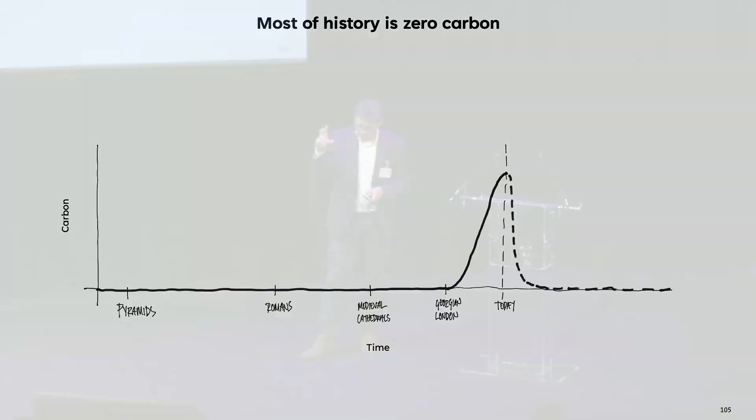We have accelerated hugely over the last 50 years the amount of carbon that we as a species are producing and emitting into the environment. We also know that we will probably - and I'm pretty confident it will happen, I'm not one of the pessimists about it - get to a point very soon where we're in a post-carbon age. It is from today, the next couple of decades, plus the previous 200 years or so, that will be the aberration - that's the unusual bit. The whole of the rest of our future will be zero carbon, and the vast majority of our past is zero carbon. That's where we are, without question, headed.

But how do we get there on facades, or how have we got where we are now? This is a photograph I use a lot in talks - I think it's the most significant building of the 20th century. Most people haven't a clue what it is. It's called the Milam Building in San Antonio, Texas, built in 1928. Its significance is that it's the first building in the world that has air conditioning in it - the first building for human habitation.

Air conditioning was developed in the meatpacking industry in Chicago in the late 19th century, but this is the first building that has air conditioning in it. As you'll see, it's quite a traditional building in many respects - it's got small windows, heavy brick facades, opening windows. The air conditioning is augmenting its environment, not creating an exclusive artificial environment. If the air conditioning in this building breaks down, the building is broadly still habitable - not quite as comfortable, but broadly habitable.

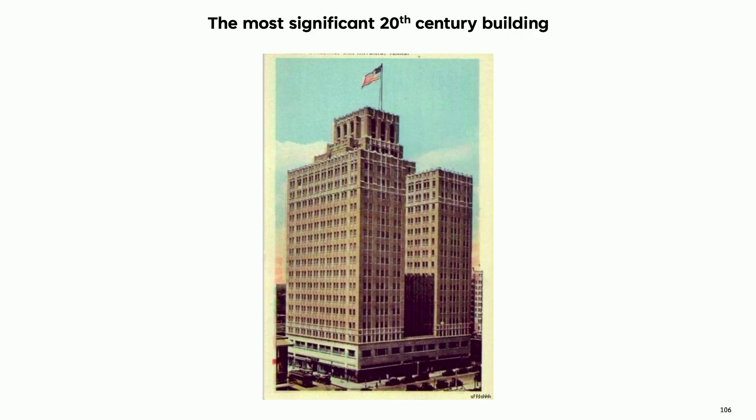Then you come to - and I'll start with a caveat, I was in Berlin last week, I went to the National Gallery by Mies for, I don't know, about the 10th time. I am hugely into and adore Mies. This isn't a pop at Mies, albeit it might seem like it - I'm a massive Mies fan. There's two Mies buildings in this.

But they record an interesting evolution for architecture, really. The first one is the Friedrichstrasse competition from 1921 in Berlin. Mies didn't win - that wasn't built, and it couldn't have been built. The structure existed, the cladding existed, the lifting technology existed, but in pre-Second World War, relatively poor Europe, the mechanical systems didn't exist for that building to be inhabitable. It could have been constructed, but it could not have been inhabited.

Then the Second World War happens. There's a massive technological explosion. Mies moves to America, which by then is much, much wealthier and more technologically advanced than Europe. And in the middle, 1958, you get the Seagram building in New York, where basically the Friedrichstrasse building is built - an all-glass facade, the building the same on all of its orientations. In effect, the architecture is being liberated from the need to temper climate.

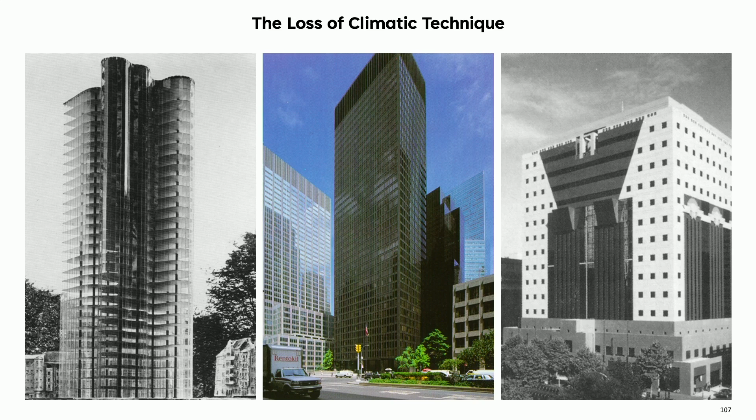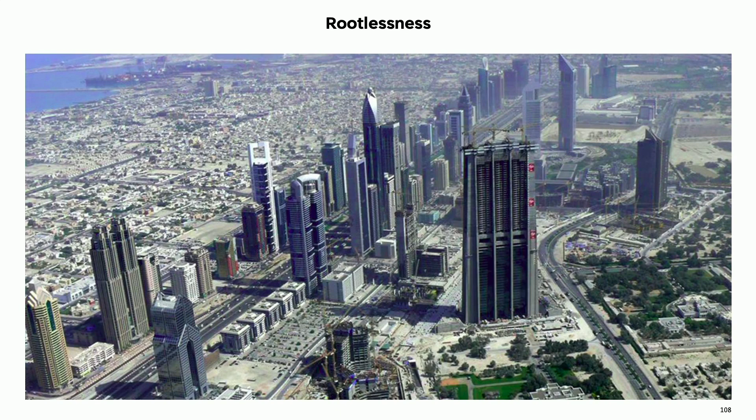And that's part of the problem that we're in right now. It brings you onto places like this, which are completely rootless culturally, hell on earth in many ways, with no connection to its environment. In some respects, these are perfume bottle architecture—the same all over the world, massive glass facades, doesn't matter where you are, everything is the same. There is a massive climatic issue with that, but there is a cultural issue too: a completely rootless world.

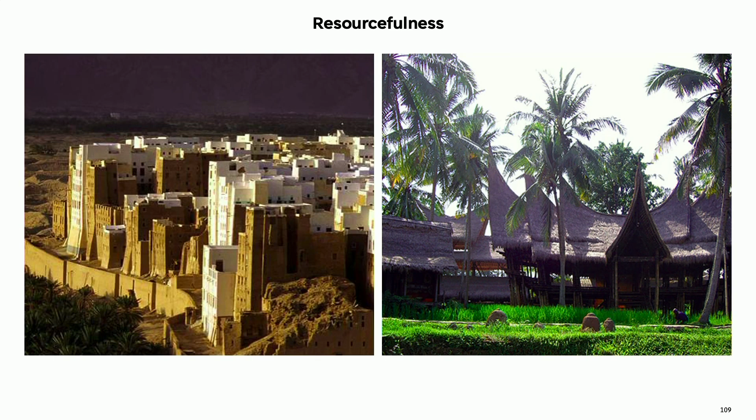We can learn huge amounts from the way vernacular architecture deals with both its ambient climate and the available resources—how it provides shelter while also tempering its climate. We'll slightly gloss over the fact one of the mud houses has collapsed on the bottom right. But whether it's mud houses in Yemen, with extraordinarily large diurnal swings and heavy use of materials to compensate, or Malaysian longhouses in an incredibly humid, static environment, they deal with it in very different ways. There are many things we can learn from that.

This is part of my education. These are the LT—lighting and thermal—curves, developed in Cambridge by a physicist in the 90s called Nick Baker, one of my tutors. At the time, Nick was trying to find a very simple way—these were all Excel-based, very simple models—to produce graphs showing, depending on orientation, internal use, and location in the world, what the best balance of heating, cooling, and lighting for glazing ratios was.

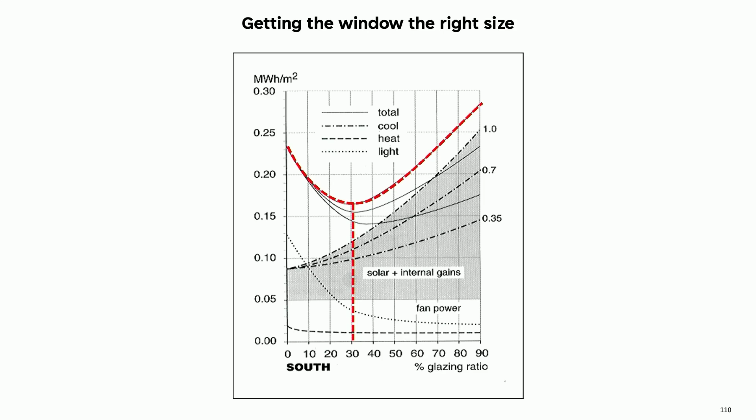As an architecture student, I was incredibly excited by that. I loved this idea that through response to climate, you could manipulate facades and buildings, and they'd change as you moved or what you did inside. We ran parametric studies using Nick's Excel spreadsheet, and the slightly disappointing result was that the ideal glazing ratio was almost always somewhere between 30 and 50%, irrespective of where in the world you were, which orientation you faced, or what you were doing inside.

For a committed modernist, that was hugely disappointing because it's basically a Georgian house. So Quinlan Terry was right, and that's the end of the lecture—a slightly disappointing place to end up: stone facades, smallish windows, and very eloquent facades.

So the dissertation I'd started, looking at how we could manipulate facades, ended up being about this: if the technical answer is so obvious, why are we not doing it? It morphed from a technical essay into really a cultural history about why we are not doing this.

And then, of course, we moved to today, and increasingly we're facing that rather complex balance between operational and upfront carbon. What this is showing is the dotted red line—the cumulative operational carbon emissions from a very typical office building from about 5 or 10 years ago—and the pink is just upfront carbon from that building, day one. As you'll see, they hardly ever meet.

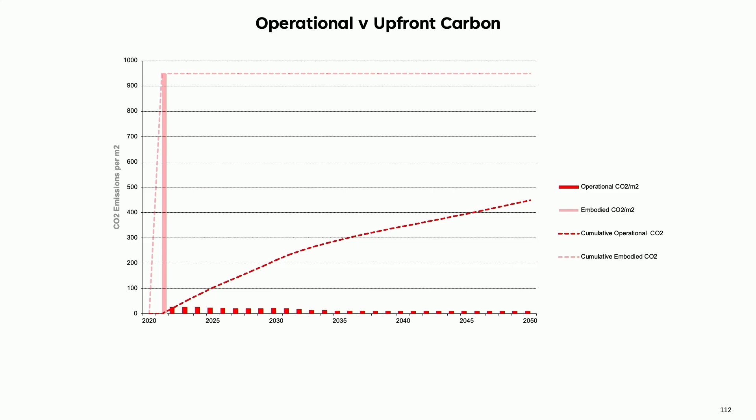In fact, grid decarbonisation is happening much quicker than we expected, so those lines will never, ever meet. Vastly more carbon is emitted by a building before anybody ever inhabits it than will be emitted for the whole of the rest of its life. That alters the equation—whereas we were focused very much on operational carbon for quite a few years, this changes the balance dramatically, and it has a big influence on facades in particular.

There are probably two primary ways we can begin to address that, talking about buildings across the board. The first is simply reusing the buildings we already have—you'll have heard those stats that 80% of the buildings we'll inhabit in 2050 already exist in cities like London. We're seeing this more and more; almost 40% of our workload now, by area, is the reuse of buildings.

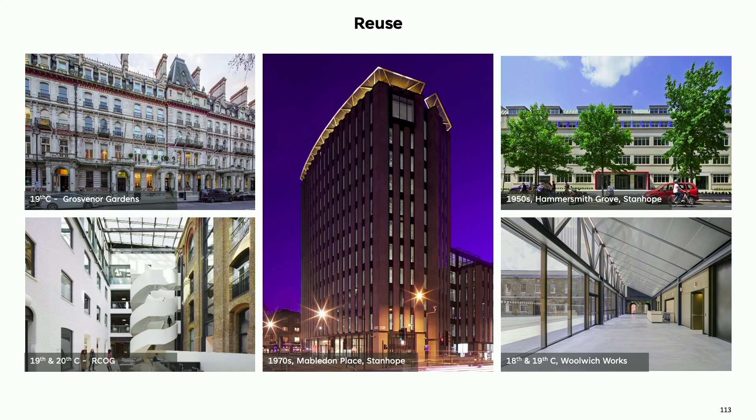If you can't reuse buildings, then the next best thing is to begin looking at much lower carbon materials, especially biogenic materials—principally, but not solely, timber. There are interesting parallels, I think, with a number of different industries and elements of buildings around where we've come from with timber as a structural material.

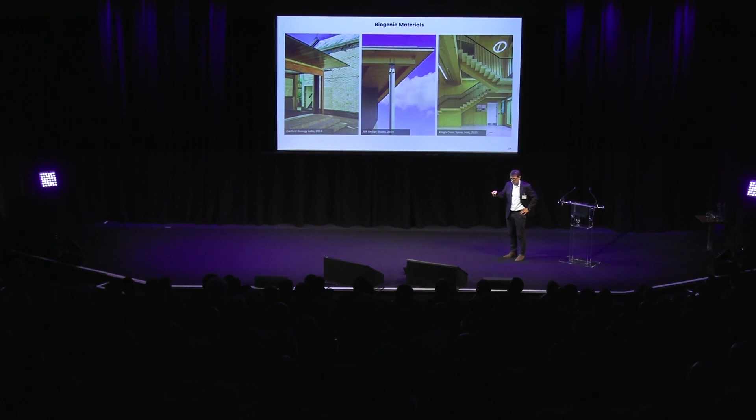I think when we first started looking at CLT in about 2008, it seemed weird and wacky and hairy. If you'd said at the time we'll be doing massive commercial schemes using CLT, like Timber Square referred to earlier, I wouldn't have thought we'd ever get there.

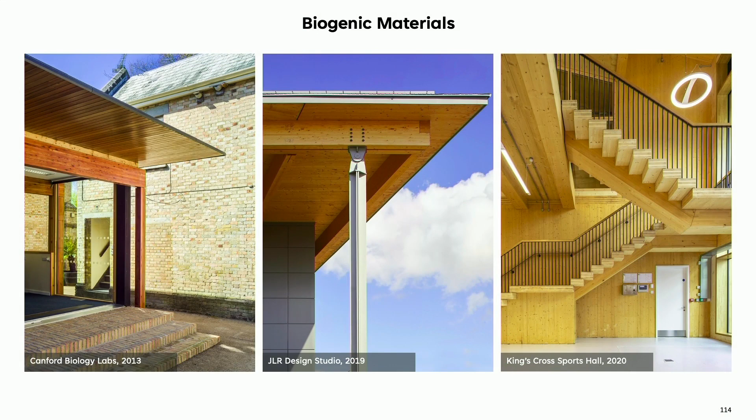These were all small projects, but now timber in some way, shape or form is pushing 40% of our workload. Here we have Timber Square, which is on site at the moment, and a full timber project in Brent Cross that we're working on. There are complexities with full timber buildings, but that has become completely mainstream.

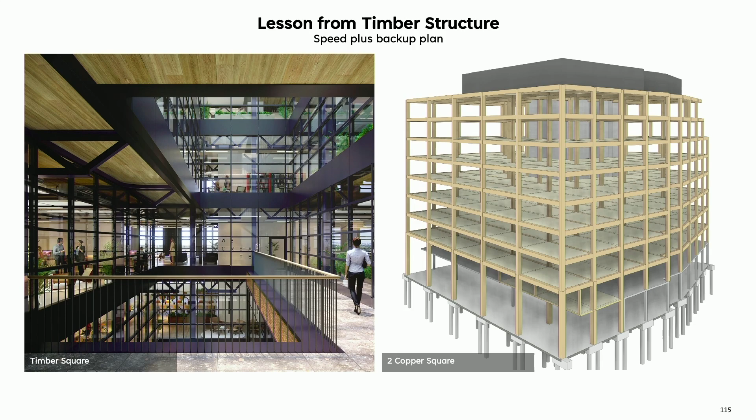So one thing we try to do all the time is keep our eyes on what are today's weird, wacky, and unfeasible materials, because some of those will end up being mainstream solutions relatively quickly. These are mostly on relatively small buildings at the moment, but they're all things we're looking at.

I'll come on in more detail with stone in a tick, but load-bearing stone—we've actually completed a few buildings now using modularized straw. The beauty of straw is that whereas with timber the growth cycle is anywhere from 20 to maybe 60 years, with straw that carbon has been sequestered within the last agricultural year. I think you can genuinely count the sequestered carbon as part of the base, the initial design, with straw.

I think that's going to get much bigger. We have more than enough straw in the UK to build something like 500,000 houses a year using it.

The other one we've been looking at, both in back of house places and also in facades, is rammed earth. There are some evolutions in modularized rammed earth in Switzerland that are very interesting.

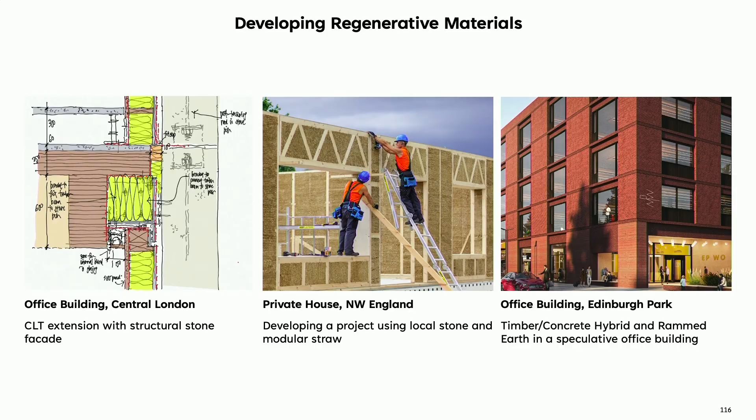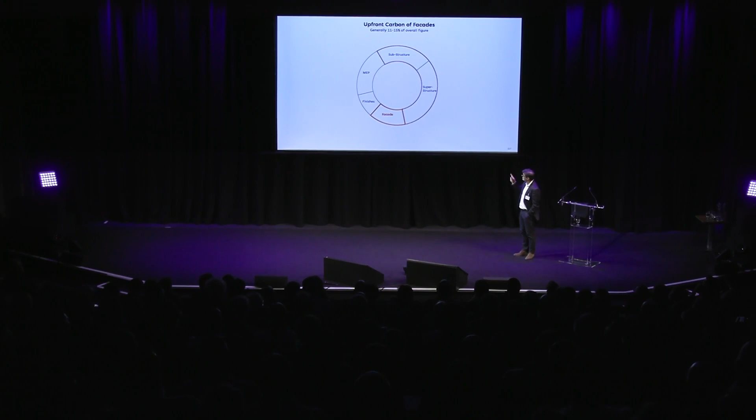Moving on to facades—clearly over the last few years the emphasis of our work has been on sub and superstructure. That's usually 50% of upfront carbon, so naturally our emphasis has been there.

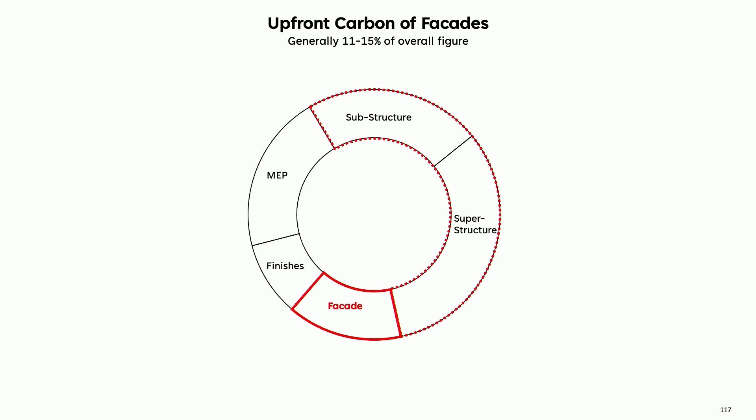But we do know the facade is quite a lot—probably somewhere between 11 and 15% on average. It's quite a significant piece, so increasingly we're looking at that.

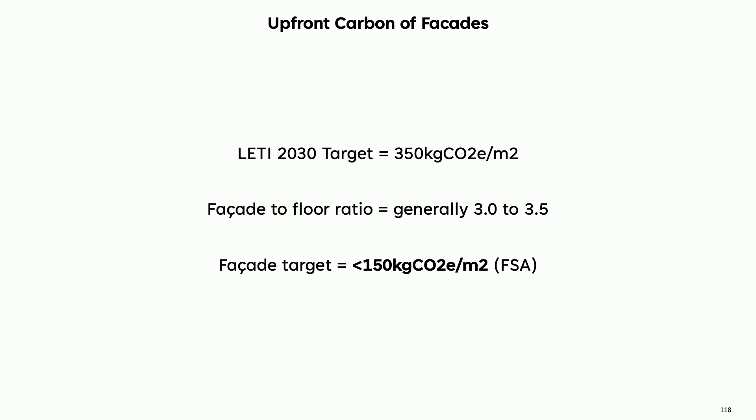If you do some very simple arithmetic to set a target, we get a LETI target of somewhere around 350 kilograms per meter squared gross area for the building. We know the general facade-to-floor area ratio is somewhere around 3, which gives us a magic number of somewhere well under 150 kilograms of CO2 per meter squared of facade area. That's got to be our target, probably pushing down towards 100 really, for us to have a realistic chance of hitting that overall building number of 350.

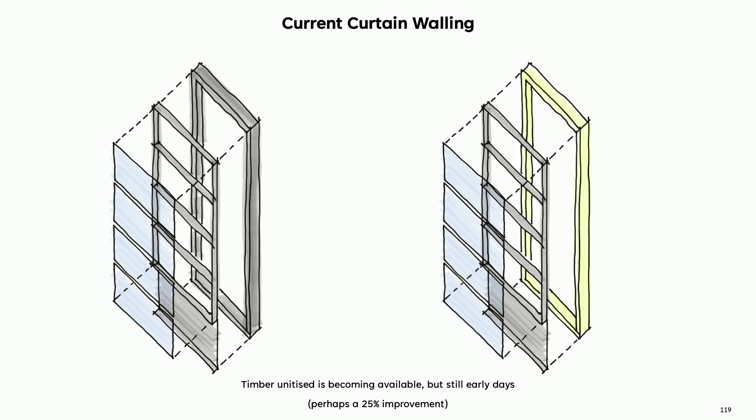So some of the evolutions we're looking at—and this is very interesting—is timber unitized curtain walling. It's not something we've actually done on a project yet, but we've done quite a bit of looking at it with various cladding contractors, and I think that's becoming more and more feasible. There are some questions around cost and fire, but those are slowly being addressed, and we think we can probably reduce the overall upfront carbon by maybe a quarter on something like that.

That brings me to the last few slides, which is one potential solution we're quite interested in at the moment. This isn't saying it's the solitary solution—I don't think it is—but something we've been interested in for a long time has been stone.

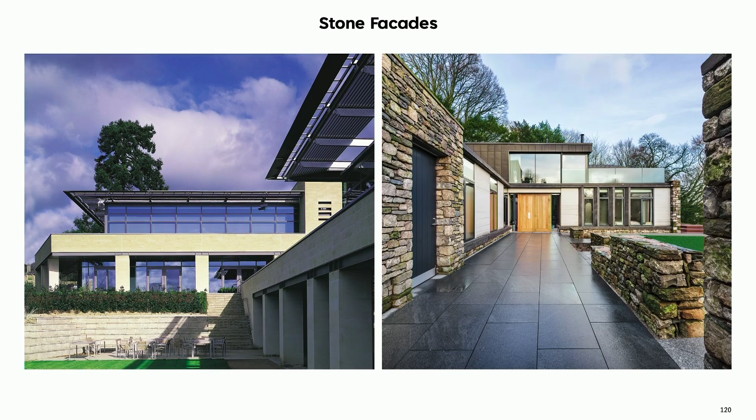We've done quite a lot of stone buildings, but it's usually been stone as a cladding, not as a load-bearing material. The interest there is that stone is very rooted in where it's from. A stone building in southwest England looks radically different to a stone building in Yorkshire, or the west coast of Scotland, because the material is literally beneath your feet and it changes.

So that's one excitement about it, but its carbon is also, as long as you don't do too much to it and you don't transport it too far, a relatively low carbon material.

There's a piece of work we're doing at the moment, looking at research. I wouldn't wholly trust the numbers, but I would trust the proportions. There's a lot of detail to go through, but it's beginning to look at the comparative benefits of a curtain walling system moving to something more solid—50% solid, using stone on a precast concrete backing. That's a very familiar technology.

Then looking at, can we use something similar but begin removing elements of structure? And finally, looking at full load-bearing structural stone as part of the wall of a building.

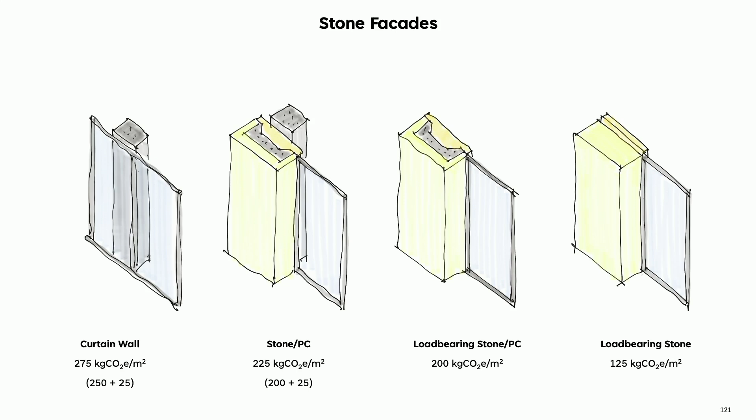You can reduce the carbon emissions pretty sharply through that. We're fairly confident you can get probably below some of those numbers. And it comes onto one of the benefits, which is that inevitable problem we have on every project: time versus cost versus carbon.

But if we can just use less stuff, that's less cost and it's less carbon. Now, one thing that's been coming up recently on a number of projects is when you begin looking at the facade and trying to balance cost and carbon and put more solid on the wall, aluminium's not the place to start, but looking at handset brickwork comes out very, very well. Metsec behind it, handset brickwork done in lime, it comes out very well on cost and on carbon.

But I have to say, it just doesn't feel like the future to me. Sending increasingly middle-aged blokes up the outside of buildings to lay small format things on top of one another in all forms of inclement weather. We are a quarter of the way through the 21st century. That doesn't feel like where we should be going.

So you can prefabricate it, of course you can. But cost is good, time is good, carbon goes through the roof.

And of course, we found on timber, always having a plan B is the best way of moving forward. You've got to have a route that you can back out. That's somewhat conflicting with some of the things this morning about building safety acts and always having everything set out, several projects in advance. But being able to twin track an approach often helps you keep the one that you're trying to keep going. Plan A keeps going if there is a conventional plan B.

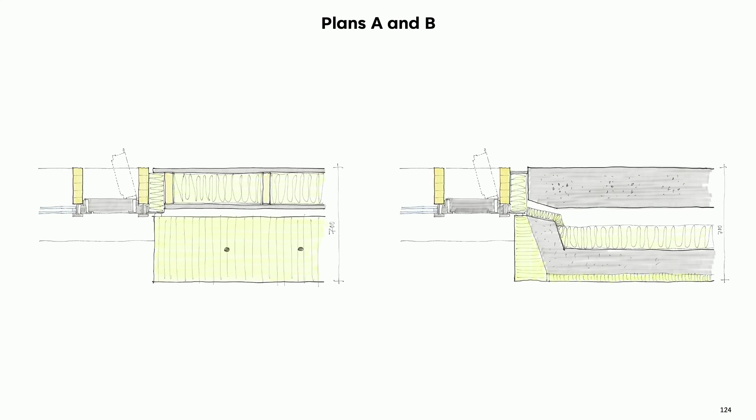So this is some stuff we've been looking at. This is 40 Chancery Lane, which we did a few years ago, and the details for that. It looks like a stone building. It's actually a precast concrete building. And if we can simply replace - nothing about it geometrically changes - but if we can just replace 50% of that with mass stone, we can get a huge long way towards much, much lower carbon buildings.

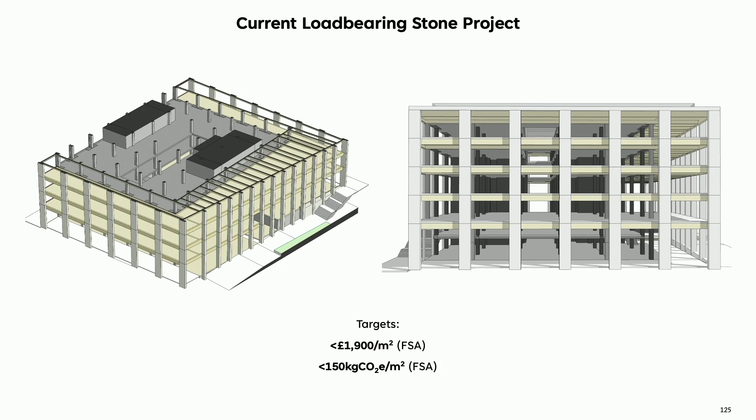And so the penultimate slide is just one building we're working on at the moment. It's in the city, we've got our carbon targets. It's a reuse of a big concrete frame, and we're putting a timber wrap around that and then using limestone around the edge as the load-bearing structure. Provided we can hit all of the carbon and cost targets - and it's in the city, so the cost targets are actually very high - then we can get to a much lower carbon building that is almost entirely dry in its construction. So it's a load-bearing stone facade, and it's a full timber new structure.

Peter, thank you. First of all, obviously your topic, presentation, and content has been highly appreciated. This is a really interesting topic because...

Do we need to go backwards then to go forward? We seem to have lost common sense here in terms of using and reusing materials. We need to go back perhaps to those days where you didn't throw away anything. And the reason you didn't throw away anything is because you didn't have anything. So anything that you had, you would use it, reuse it, and so on. It's not just about Georgian houses - we have churches and castles in Europe which are built from tombstones, from pieces of other buildings. They may not look particularly well, they're a bit patchy, but they've been there for thousands, hundreds of years. How do we get back to that? The pyramids have been there for 4,000 years, so in a way...